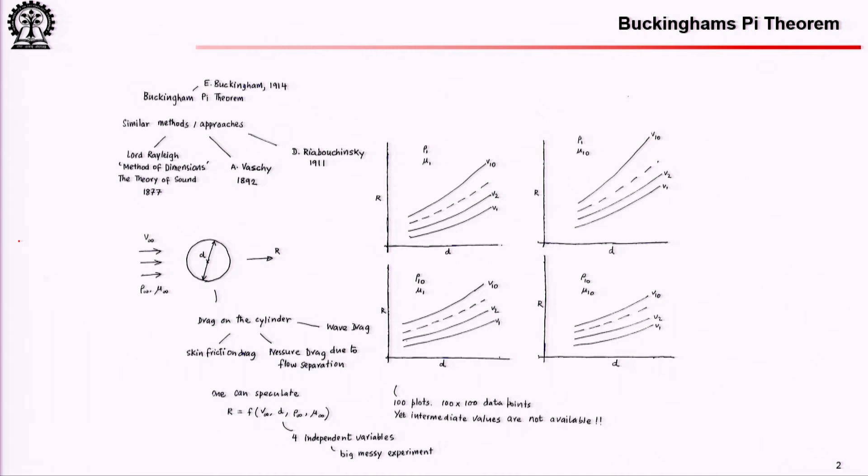You also saw that depending on the choice of something known as the repeating variables, these pi parameters that you might obtain in an experiment or in a study could have physical significance or may not have direct physical significance. For example, if you choose the repeating variables in a certain way, you might end up with non-dimensional groups or pi parameters which are nothing but Reynolds number, Mach number, Prandtl number, etc.

But with a different choice of the repeating variables, you might get other pi parameters or non-dimensional groups, which are important nonetheless, but may not have direct physical importance in terms of what we use to assign physical importance. Parameters such as Reynolds number and Mach number may not directly come out of a different choice of repeating variables, but nonetheless those pi parameters can also be combined in various ways to obtain physically relevant pi parameters.

We will see that another approach to obtain these non-dimensional groups is through the non-dimensionalization of governing equations. In fluid mechanics or aerodynamics, the governing equations are nothing but the equations of conservation of mass, momentum, energy, etc., applied to a volume of fluid. And we will see that depending on how you formulate them, the governing equations look slightly different, but they convey the same physical principle.

And when we start with these governing equations, we can non-dimensionalize them, and we will see that in that non-dimensional equation, these pi parameter kind of non-dimensional groups come out as coefficients in front of the differential operators, and we will see what implication those non-dimensional groups have in finding similarity between one flow problem and another flow problem, etc.

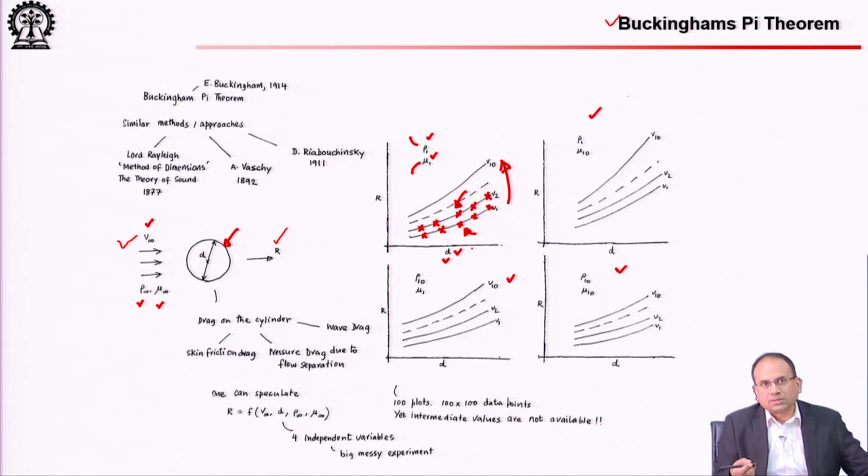We said that instead of plotting the physical parameters like drag versus the diameter, or drag versus density or viscosity holding some other things constant, what you could have done is plotted this non-dimensional group versus this non-dimensional group, and it could be shown that results from different experiments are actually collapsing on this line that gives you a functional relationship between these two non-dimensional groups. Now, the question is how do we get these non-dimensional groups and how are they relevant?

So, the relevance of these things becomes more explicit when we look at the similarity parameters that fall out of the governing equations. Right now at least we see that these are non-dimensional groups. When you run the experiments and you get the measurements, instead of plotting the physical variables against one another, you plot the pi or the non-dimensional values against one another, and it results in a collapse of data along some functional line.

So, if you are interested to find what is the resistance on a cylinder of a certain diameter, viscosity, etc., all you have to do is calculate this number, and then you will see that your desired point falls on that functional line. Okay, that is the value of this collapse of information. So, starting from a functional relationship between the physical parameters.

Now, again I said that depending on the granularity of the problem, you can choose some physical parameters. So, this is a functional relationship between the drag force on the cylinder and the free stream velocity, diameter of the cylinder, free stream density, free stream viscosity, but we could have also added say the surface roughness of the cylinder. We could have added the effect of compressibility if we are talking about a cylinder at a moderately high Mach number flow. In those cases some additional physical parameters would come into the picture, possibly giving us some additional pi parameters.

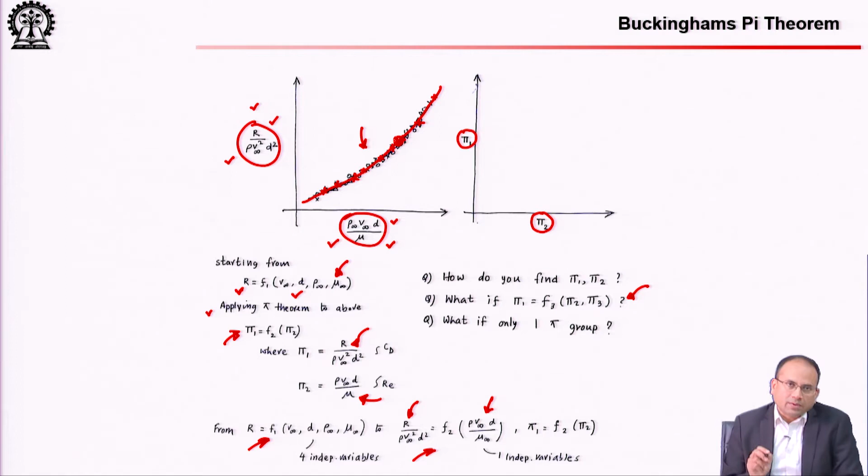So, the Buckingham's pi theorem, as we have seen in the last class, just gives us some of these pi parameters. It does not give us the explicit relationship between these parameters. That you figure out from an experiment. This is just a hypothetical relationship between these two parameters. When you run your experiments, you will see the details of this relationship. So, Buckingham's pi just gives us the pi parameters, but not the explicit relationship, so we do not know how the plot will look when we run an experiment and plot these non-dimensional variables against one another.

So, then we looked at this one problem, which was kind of the method in which you apply Buckingham's pi. You start from the physical relationship, you figure out the number of physical parameters, then the number of fundamental dimensional quantities. So, essentially you have to create a table like this, you have to figure out what dimensions are included in each of the physical variables. From this dimensions column, you figure out among mass, length, time, temperature and charge, how many fundamental dimensions are involved in this problem.

So, you see that we have 1, 2, 3, 4, 5 physical variables, and in terms of the fundamental dimensional quantities, we have mass here, we have length here, we have time here. Of course, we have these in more than one variable. So, then we have 3 fundamental dimensional quantities, and based on the Buckingham's pi theorem we will have 5 minus 3, so m minus n, non-dimensional groups. So, this relationship can then be converted into a relationship between two non-dimensional groups for this particular problem.

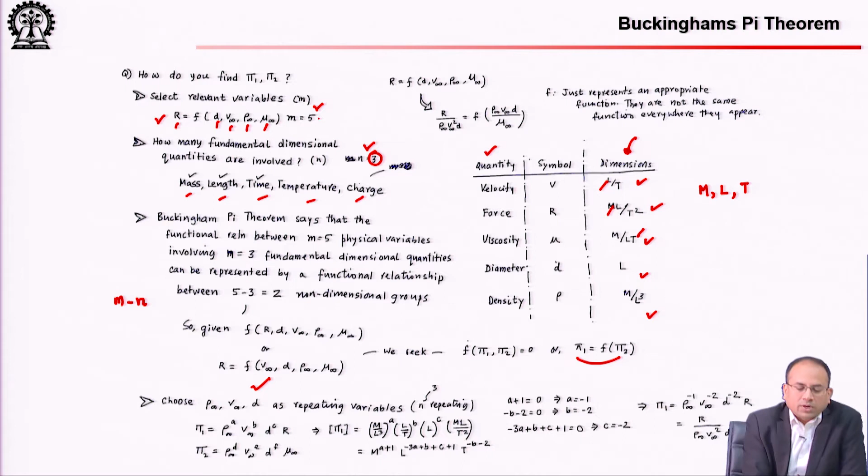So, if somehow m becomes 7, for example, if we include things like the surface roughness and also the compressibility effect, which might be modeled by the speed of sound inclusion in that relationship, we might have more than 2 pi parameters. And here we also saw in the last lecture how to obtain these pi parameters by using the method of repeating variables.

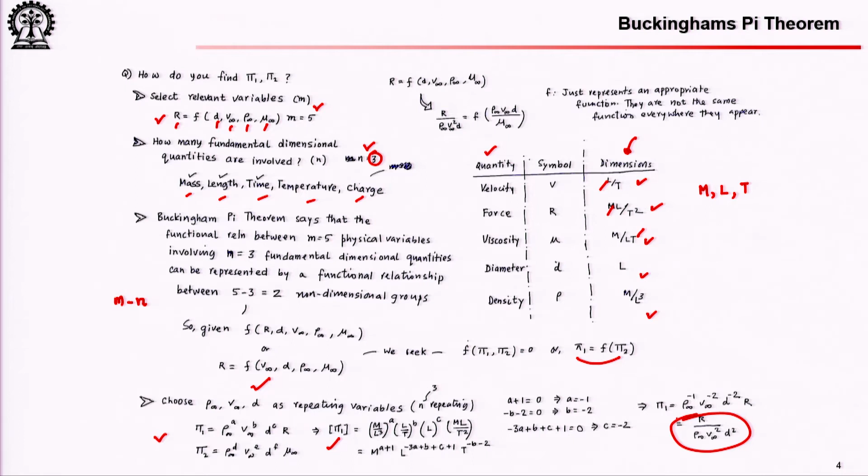So, you choose some repeating variables and then you create a balance of these dimensions, because these non-dimensional groups do not have any dimensions, whereas on the right hand side the repeating variables with the non-repeating variable will have some dimension, but we will force that dimension on the right hand side to be 0, so that it matches the dimension on the left hand side, which is the dimension of a pi parameter, and that way we can get terms such as pi 1 and then pi 2.

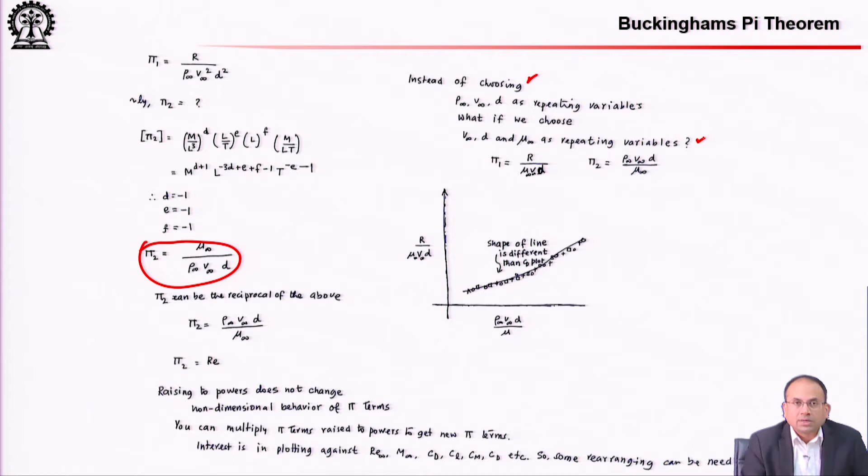Now, we said that instead of choosing these as repeating variables, what if we choose something else as repeating variables? The answer we saw is that you still have these non-dimensional groups, but it is possible that these will not be the common non-dimensional or similarity parameters that we typically talk about, Reynolds number, Mach number, drag coefficient, etc. But still they will be useful in terms of reduction in the number of independent variables in an experiment, and the collapse of data also will be there.

And it can be shown that for pi 1, pi 2, if you multiply by some constant, if you raise it to some power, if you take a product of those two raised to a power or multiplied by some constant, the resulting product will also be a non-dimensional parameter. So, depending on the choice of your repeating variables, you might get pi 1, pi 2, pi 3, which are physically relevant, like the Reynolds number, drag coefficient, etc.

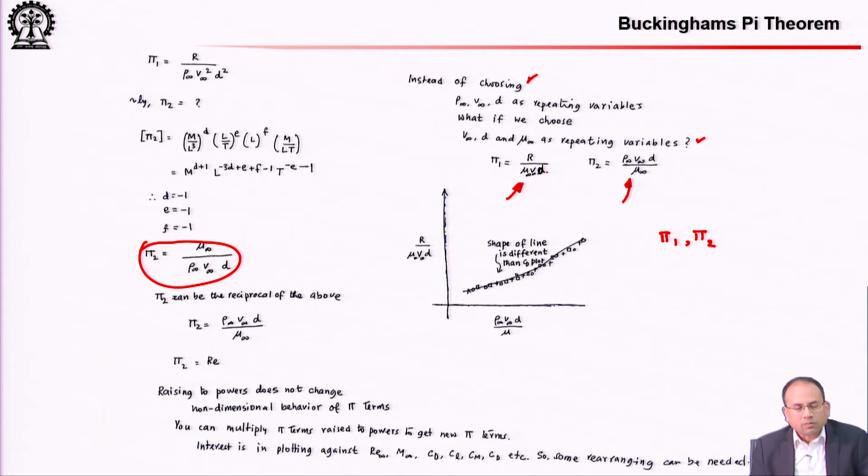Sometimes, for example, this drag divided by mu v infinity d does not have a very formal name in terms of the parameters that we really talk about, and we will see what these similarity parameters are and how they fall out from the governing partial differential equations.

Okay, so in the last lecture we also looked at the speed of a blast wave, as G. I. Taylor in 1950 applied the Buckingham's pi theorem approach, also known as dimensional analysis or similitude, to finding out the amount of energy that was released in these atom bomb explosions.

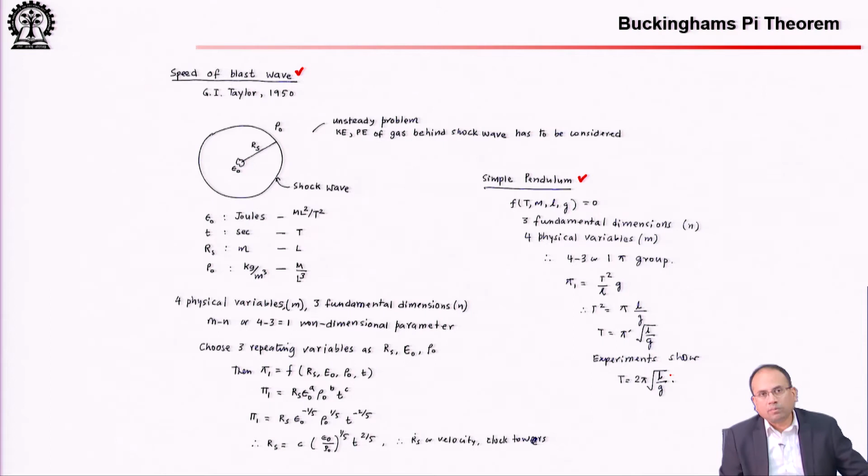We also saw that the time period of a simple pendulum can also be obtained using the Buckingham's pi theorem approach. And of course, we are interested in something of the sort of the force on an airfoil or a wing. And here, the way you do this one, again, this is another specific example of what we have already seen before.

So, first choose pertinent variables that are important to the problem. So, here we see that the force on this wing cross section depends on physical parameters such as V infinity, rho infinity, mu infinity, a infinity. We will see that if you want to bring in the effect of compressibility, you can use a infinity as a parameter as well. And then this angle of attack,

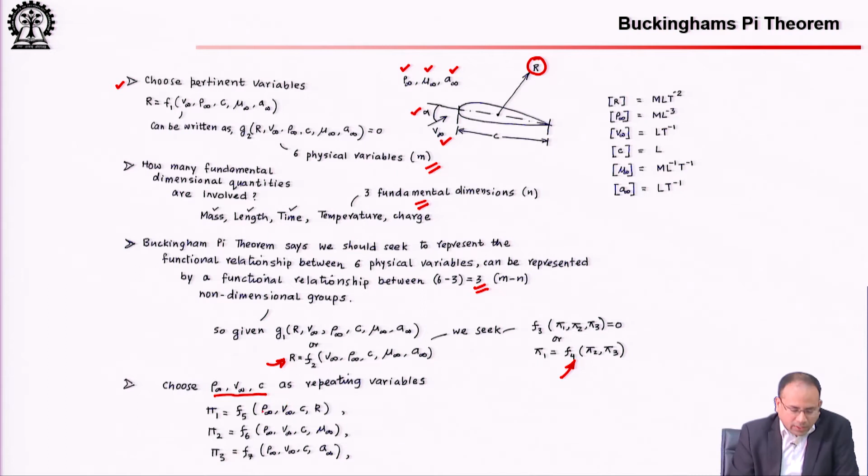you can include it as a non-dimensional parameter in the final form, because if it is in radians, it is dimensionless. So, 6 physical variables in this problem, 3 fundamental dimensions. So, we will have 6 minus 3, or 3 non-dimensional groups. So, given this situation, we will seek a relationship between 3 non-dimensional groups. So, if you choose rho, V infinity and c, c being the chord length of this wing, then you can get 3 of these pi parameters, and essentially it will result in these 3

similarity parameters. In fact, if you see, your pi 1 is R by rho V infinity square c square; that one can be adjusted. So, see, I have multiplied it by a constant, half. So, as I said, you can raise pi 1 to some powers, you can multiply it by some constants, it still is a valid non-dimensional group. So, instead of pi 1, we can slightly modify this parameter and get something which is of physical relevance.

So, if you remember, this is the drag coefficient or the force coefficient. So, R divided by half rho V square into some area term. See, this area term and this c square term have the same dimension. So, we can use that physical information to get a modified pi parameter that has some physical sense. Although the original would give the collapse of data, reduce the number of independent variables in your experiment, and allow you to interpolate and extrapolate results for an airfoil section of a different chord length in an unknown V infinity, rho infinity situation,

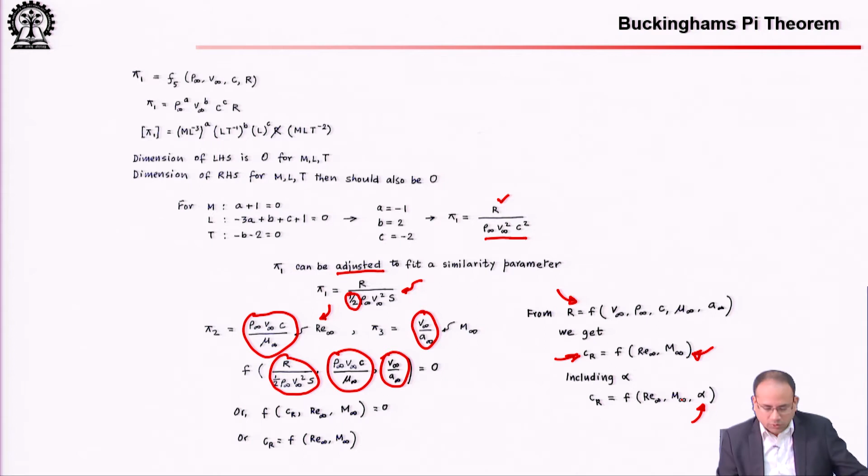Now, in your aerodynamics lab in the second year, you will come across this experiment where you report CD versus Reynolds number on a circular cylinder mounted in a wind tunnel. This is a very extended plot. The Reynolds number ranges from 10 to the power minus 1 all the way to 10 to the power 7, so a huge range has been covered. And in this region we have the Stokes flow regime, where you have very high viscous drag.

However, for aerospace applications, typically we are looking at Reynolds numbers somewhere in that range, and in your experiments you might be fortunate enough to see this functional relationship between CD and Reynolds number, where you see a sharp fall in drag around a certain Reynolds number. Around that Reynolds number you see that very precipitous drop in CD.

Of course, if you want to calculate drag, if you want to calculate velocity, you can use CD, use the dimensions and some known parameters, and from these non-dimensional groups you can still go back to the physical parameters. Okay, it is not that once you move to the non-dimensional groups you are losing track of the physical parameters. So, the non-dimensional groups are just helping you to have less number of independent variables.

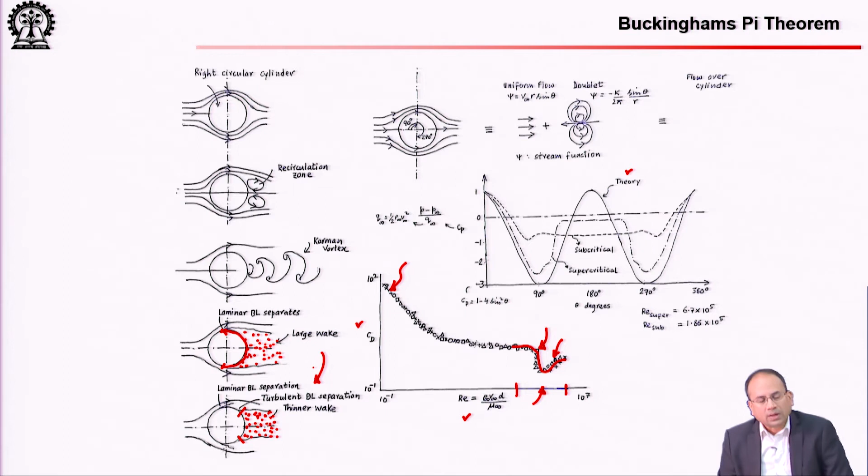Okay, now, this is what I wanted to discuss in today's lecture. So, this Buckingham's pi theorem gives you some non-dimensional parameters that are relevant for a problem. If you are lucky and you have chosen your repeating variables, I mean not in a proper way, but if you have chosen your repeating variables in a certain way, you might end up getting non-dimensional groups that have this physical significance, which we commonly might use as Reynolds number, Mach number, etc.

However, you can also get these non-dimensional groups from the governing equations, and we will see that this gives a very important insight into something known as dynamic similarity. Okay, so, I have added this term dynamic similarity.

So, this is the same problem that I talked about in the start of the class: how do you say that the data we get from this experiment you are running in a wind tunnel can be used to obtain information on a vehicle that is flying at 30,000 feet at a certain Mach number? Or rather, how do you plan your experiment in a wind tunnel so that it gives you information that is useful for understanding what is happening with a real flight condition at a certain altitude, Mach number condition?

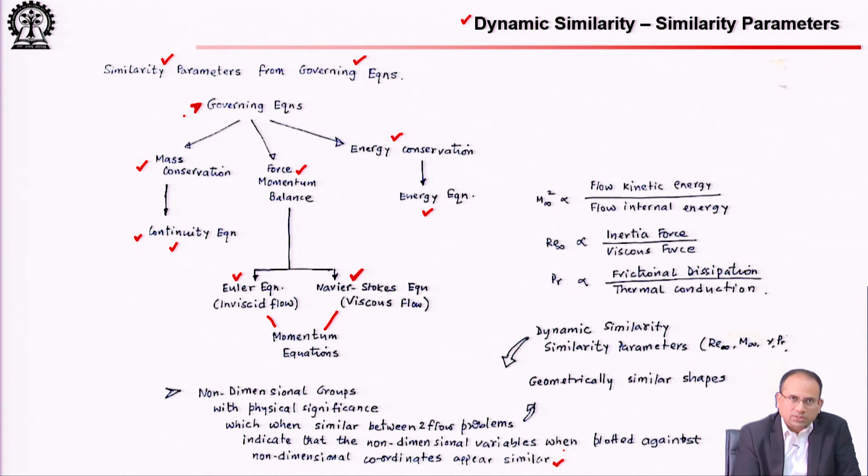Okay, let us wait for this portion till we see what really we are talking about. So, first of all, let us focus our attention on the governing equations. Let me at least show you what is going to come out of all this work. So, this looks a little cluttered in this particular slide, and for those who are interested to go through this material on their own, you can look up chapter 6 of Hypersonic and High Temperature Gas Dynamics by John Anderson. Chapter 6 deals with viscous hypersonic flow.

So, of course, this is an advanced topic, but nonetheless these governing equations are there. Essentially any kind of real flow problem will have the same governing equations to begin with. So, here you see we have the continuity equation, which is a statement of the conservation of mass. You apply conservation of mass to an infinitesimal fluid element or to a finite expanse fluid element, you get a governing relationship which is known as the continuity equation, and it looks like this. Okay, so that is the continuity equation.

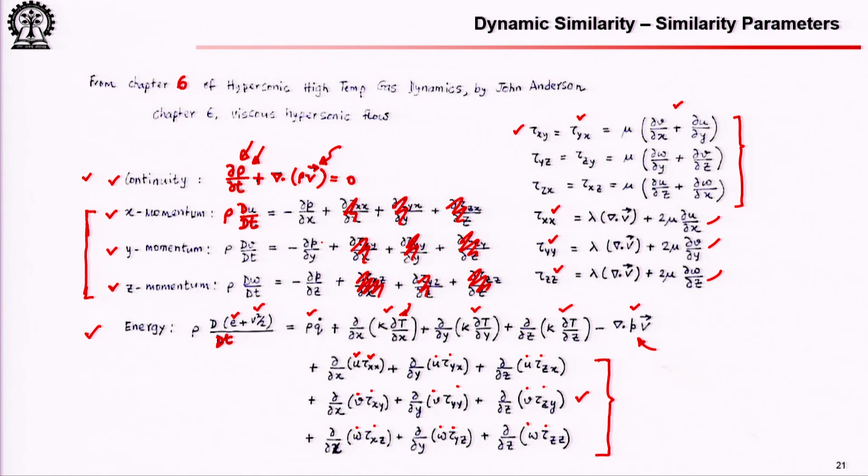In this case, this one is more revealing. So, you start with the governing equation. Governing equations can be based on conservation of mass, momentum, energy. From the dimensional forms of these equations, you try to convert them into a non-dimensional form, and the way to do it is, you replace these dimensional variables by their non-dimensional counterparts by dividing them with some reference values. So, here your rho infinity, V infinity, p infinity, and others that you are using to get the non-dimensional versions of these variables are known as the reference variables.